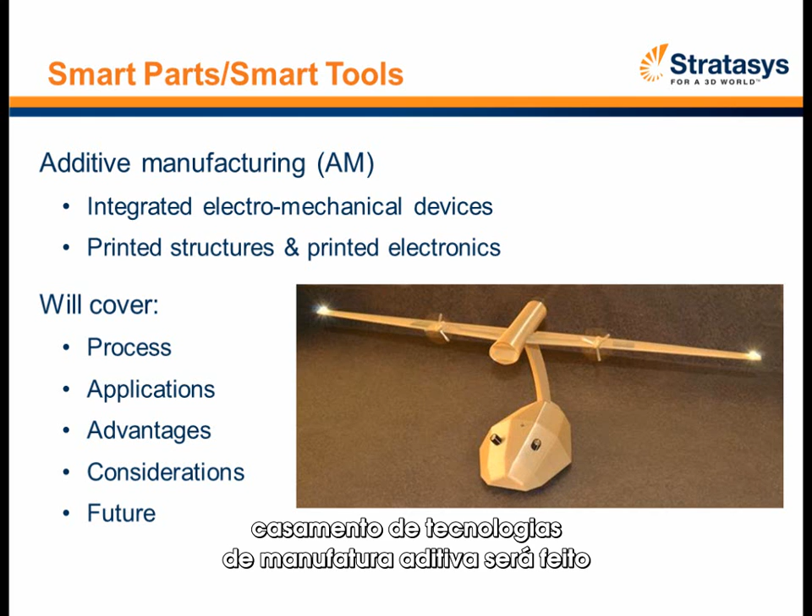Well, thank you, Kim. I'm delighted to talk about the smart tools and smart parts technology and how it's leveraging additive manufacturing technologies, not only those offered by Stratasys, but also those offered by Optomec. What we're going to cover in this presentation is how these processes work individually, how they then work in a combined process, what's really the output they deliver as far as applications, and then the advantages of marrying these technologies together, plus what you have to think about when you do this marriage of additive manufacturing technologies.

So when I start talking about marrying two additive manufacturing technologies together, in particular I'm talking about the fused deposition modeling, the FDM technology from Stratasys, which uses a number of different types of engineering thermoplastics that we can extrude with the FDM process. The Optomec aerosol jet, AJ for short, is a way that they actually print circuits onto non-planar surfaces, typically using a nanoparticle silver conductive material that gets printed onto a surface.

So why do we do this? We talked about fully printed hybrid structures. So people out there want to know what a hybrid structure is. Well, from our opinion, a hybrid structure is -- if you've ever taken a radio apart, or any type of electronic device apart at home, and looked inside, you've got wires, you've got circuit cards, and so that's basically hybrid.

You've got printed circuit boards, you've got wires that attach different power sources. How do you minimize the amount of components that go into that? And the number of wires, connectors, clips and brackets to hold down the different wires? How can we use the power of additive manufacturing to eliminate the number of components and connection points, and combine that together? That's what we're considering to be hybrid -- being able to integrate a 10-piece assembly into maybe a 1 or 2-piece assembly using the power of additive manufacturing in this particular case.

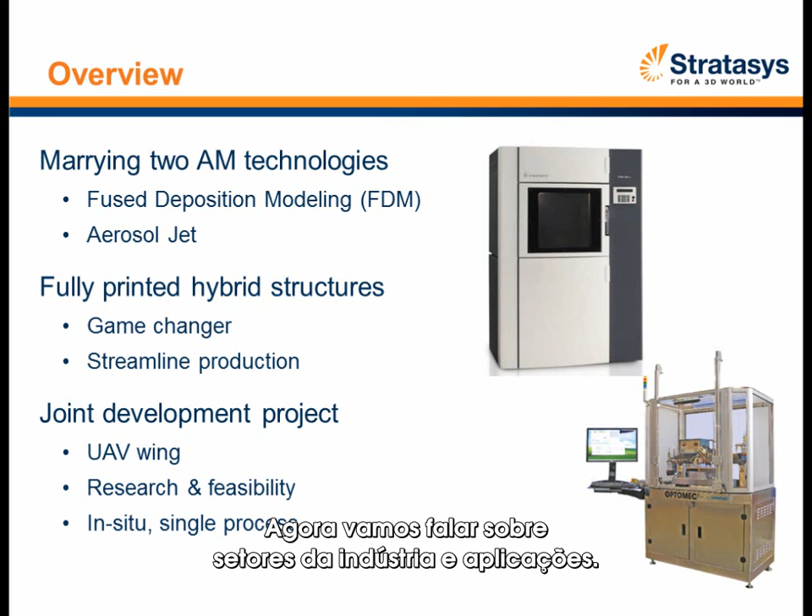So now I'm going to move into talking about industries and applications. This is just a short list of some of the industries. Obviously the aerospace industry - when you start looking at hybrid structures, the integration with airplanes, both for commercial and military applications, getting lightweight structures reduces fuel consumption, and that's a very positive thing. If you can find ways to continue to remove weight from airplanes and improve fuel efficiency, the airlines will give you a big hug. So that's a key area.

Then we move on to automotive. We all pretty much own cars and drive and depend on our cars daily. Where could this go in automotive? For those of us who might be engineers or just have the knack of taking things apart to see how things work - have you ever taken a dashboard out of a car and seen all the wires and connection points behind it? Or put a radio in your own car and seen all the wires and connection points behind your dash or console? Just think if we could actually reduce a lot of those wires and connection points with an integrated piece of structure.

Weight reduction, faster performance of electronic signals and connection points - so consumer electronics, many different fronts on that front of what we could do, anything from 3D interconnects for stacked dies and complex packaging applications, which is a very interesting one for consumer electronics.

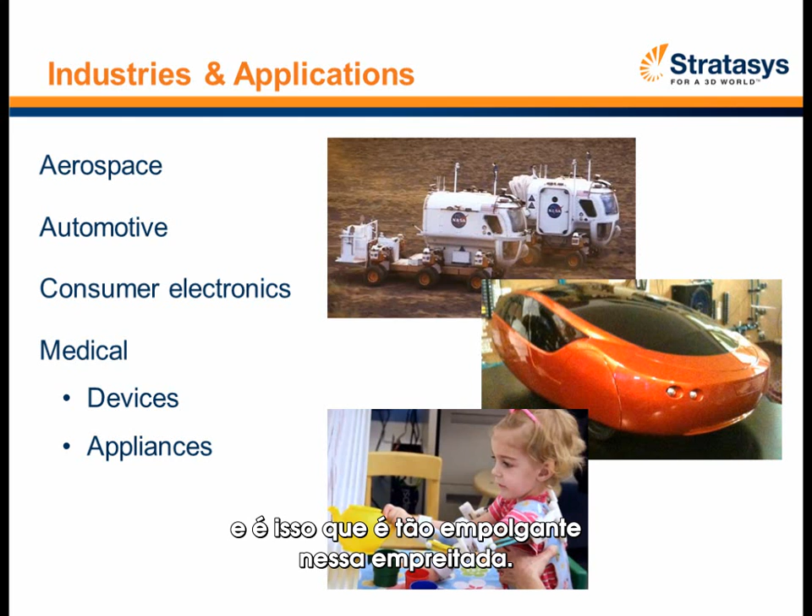So the advantages of the technologies - if you're sitting back and saying, hey, Jeff DeGrange just sounds really great, but what are the advantages here? I did talk about reducing weight - that's very real. Having energy-efficient structures, reduced part count are very critical in many different industries. When you reduce the part count, you reduce the amount of time it takes to assemble things, to check things. So that comes with real cost savings and real cycle time savings.

And when I talk about connection points, there's fewer failure modes at connection points. Can you imagine taking wires, and at the end of the wires you take your red wire and screw it to another red wire, put an electrical cap on it, and continue on down the line? If you can eliminate all those connection points, and the little clips and brackets that have to hold the wires down - how well did you tighten some of the wires? That's what we talk about as failure modes. Typically in a wired electrical system, those connection points, when the cars or vehicles vibrate, often will break apart and you'll lose a connection, and then something doesn't operate properly. So what are the benefits of this?

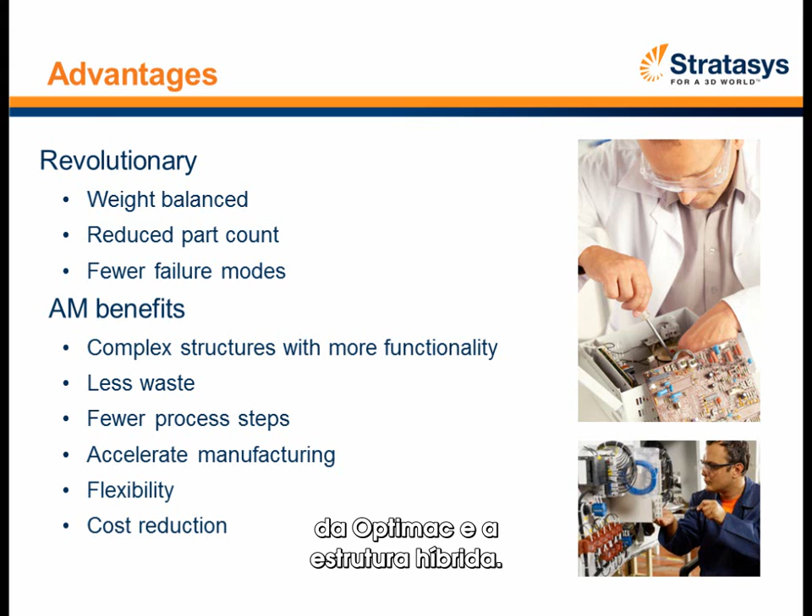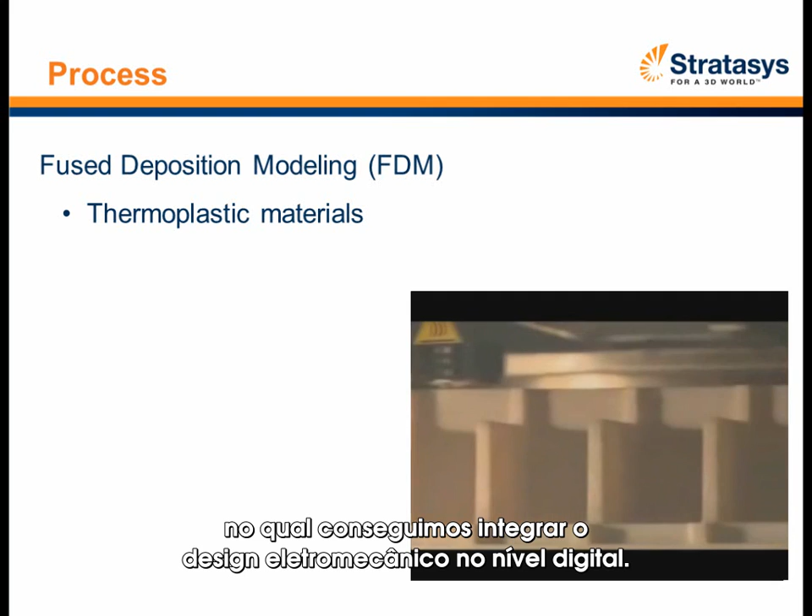Thanks, Jeff, I appreciate the great lead-in there. Today what I'm going to give the audience is an idea of a detailed project in which we were able to integrate the electromechanical design at the digital level. We're really excited about how these two technologies come together to enable us to do new and different things that we could not do in the past.

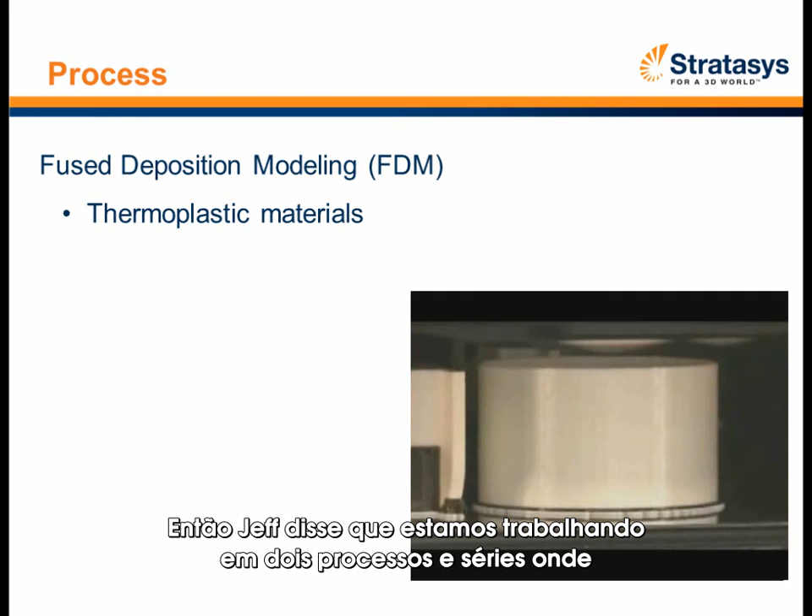As Jeff talked about, we're working on two processes in series where fused deposition modeling, or FDM, is the first process, which was used to build a wing structure. FDM is an additive layer manufacturing technology. It precisely deposits production-grade thermoplastics in a layered method to produce a finished part.

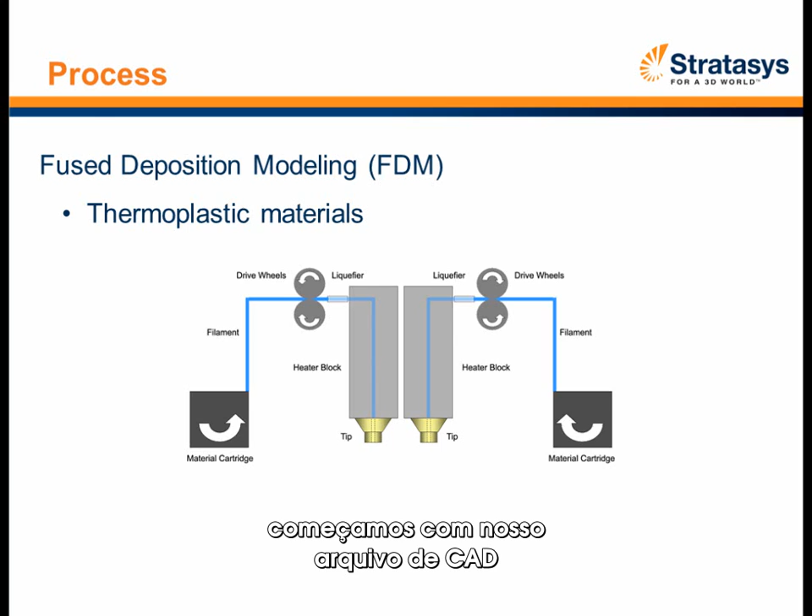For the project we're working on, we started with our CAD file and put it into the FDM software called Insight, which was able to slice our file for build, preparing the CAD model for being consumed within the FDM Fortus system. Once the file was processed, we put it into the system for build, and out comes a part complete and ready to go.

In our particular case, our wing was built without any internal support geometry or material, and the part was able to be taken off the build sheet and go directly to the post-processing steps for marrying with the aerosol jet technology.

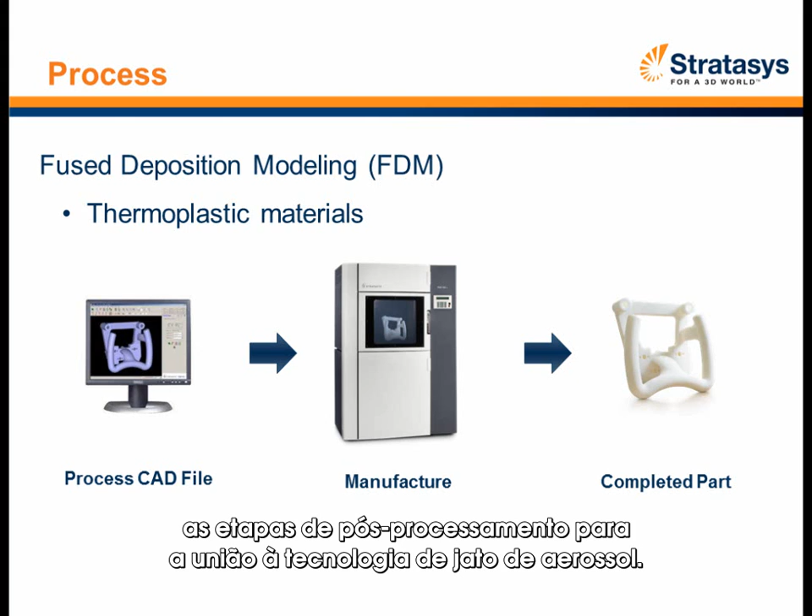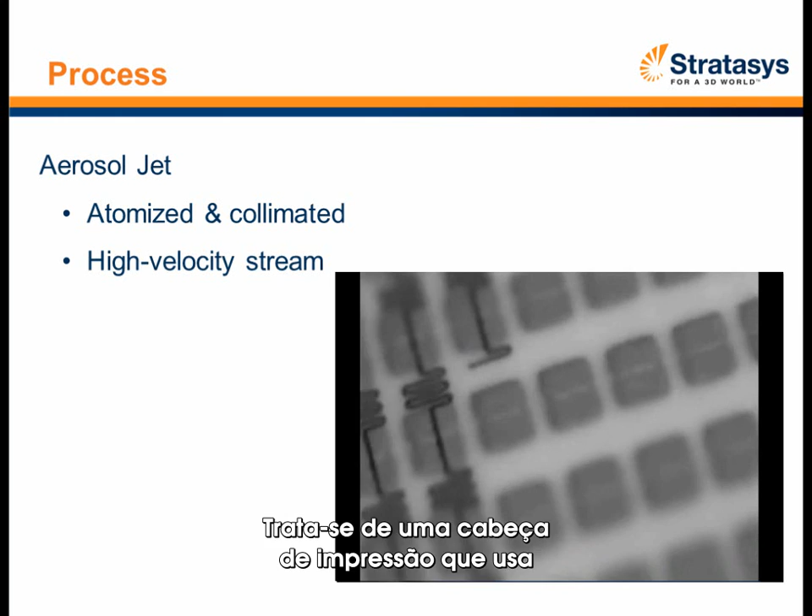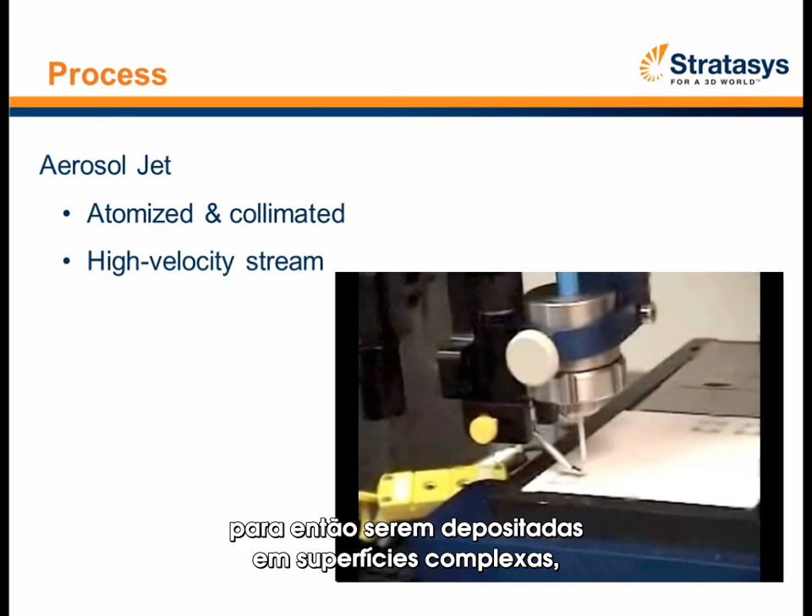So, aerosol jet is Optomec's product. It's a print head by design that uses conductive or a variety of different kinds of inks that can be atomized, collimated, and then deposited on complex surfaces, as Jeff mentioned earlier, with a high velocity stream. You see in the video here how the head is moving around and the ink being deposited on that flat surface.

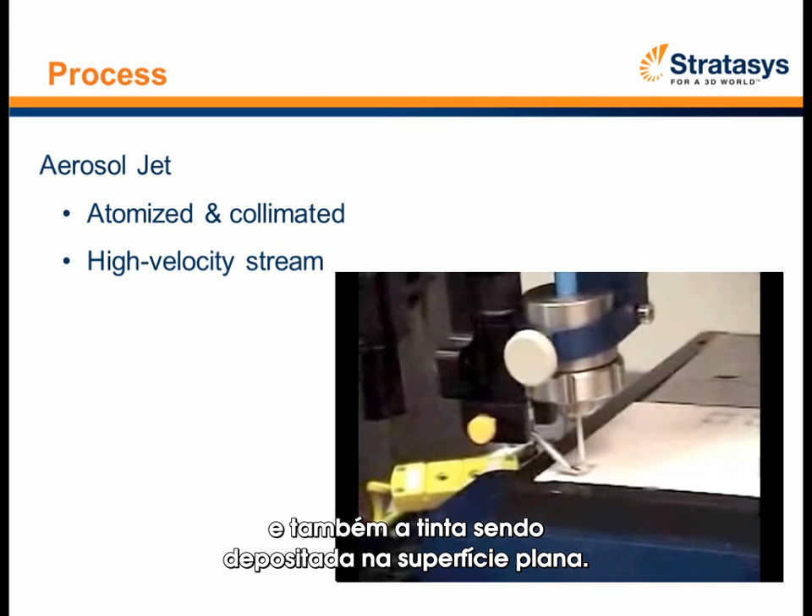The aerosol jet technology starts with a reservoir of ink. It then excites that ink into an atomized mist and feeds it through the nozzle, which creates a highly collimated stream of ink so it can precisely place that stream down on a surface.

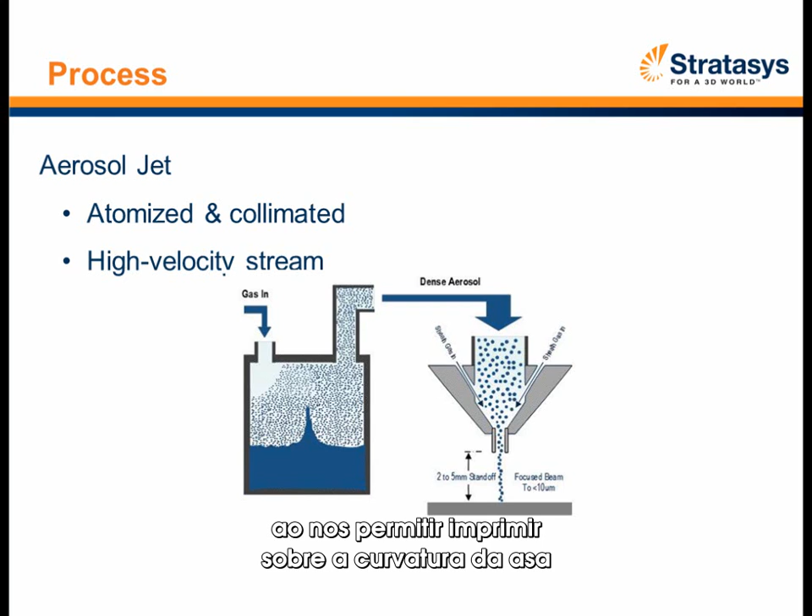The fact that it has a standoff distance, you can see here on the chart - let me get my pointer on. So right here you see the ink coming out with a standoff away from the part. This actually played favorably in our project by allowing us to print over the curvature of the wing without having to go to 5-axis control.

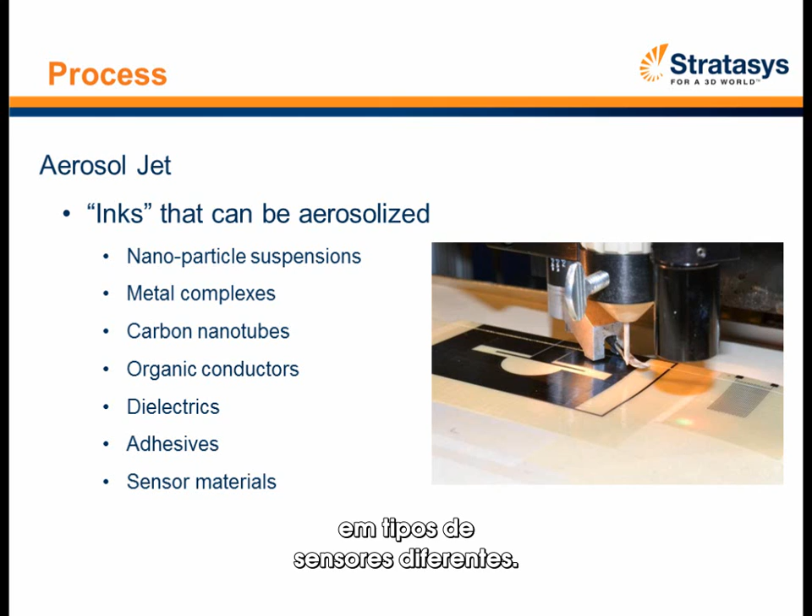Here's an image of one of the parts we were actually printing for our project. The inks we had to select from are pretty vast. Optomec has a wide range of inks, from conductive to dielectric, to adhesives that can be used for surface mounting. A wide array of different materials can be used to print your part with a variety of sensors, and I'll talk to you about all the different items we pursued in a moment.

So what did we take on? We took on the FDM process to build the wing, and that wing had to be compatible with the aerosol jet process. Two criteria came out of that: one, we wanted the wing to be representative of the typical application of a UAV, so the mechanical strength and the high heat deflection temperatures had to match the application.

The aerosol jet material was a nanoparticle silver ink, Cabot CSD23. This material requires heat sintering to get the bulk material's conductive properties up to the highest level possible, and that sintering process occurs at 300 degrees Fahrenheit. So that folds back into the heat deflection requirement for ULTEM.

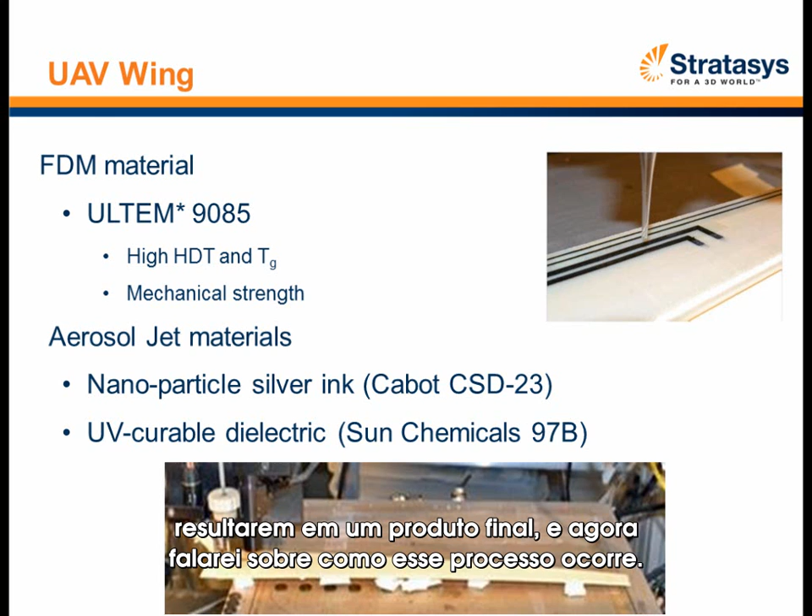ULTEM has a heat deflection temperature of around 330 degrees F, so we knew this part would withstand the sintering process. The two technologies have to map together to result in a final product, and I'll talk about how that process occurs.

First you want to design your part, both the structural part, in this case the FDM part, as well as the electronics. Whatever you're going to build has to be designed prior for the 3D definition. Once you've got your design, you can build your FDM structure, and once that structure is complete, you do surface prep on the FDM part.

One lesson from our trial was that the inks Optomec can deposit did not perform well with our low surface energy ULTEM material. As deposited, the materials would bead up or run into the cracks, so we had to find a solution to make the two compatible. We found that simple sanding or soda blasting the surface roughed it up enough to provide the required surface energy for ink deposition to go extremely well.

We also found that building fixtures was very beneficial to the process, to index the parts underneath the print head, because there are several iterations of printing involved.

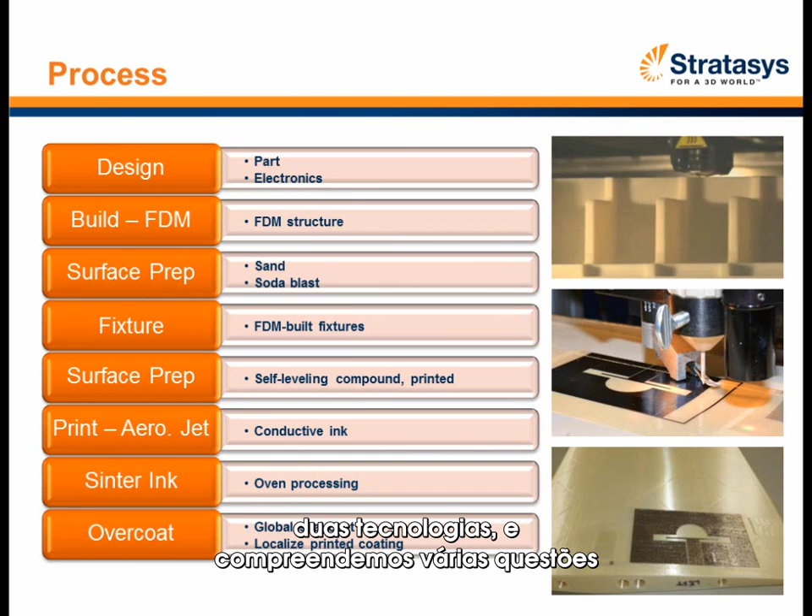Then finally, we went back into the fixture, put it back underneath the print head, and put a dielectric coating over the top. This protects the part and keeps the sensor from being exposed to external elements. So we went completely from design through finished part with the two technologies, and understood a variety of issues we had to solve to get them to be 100% compatible.

So what kind of electronics can you print, and what's of interest in this domain? There are three basic categories: sensors, circuits, and electronic components. On the sensor side, think of resistive temperature detectors, heating elements, antennas as used in this project, strain gauges, and even chemical sensors - the ability to put a robot into an environment and sense what kind of hazardous chemicals might be in the area. All of that is possible with these printing technologies.

From a circuit side, power, signal, ground planes, and RF strips all have slightly different requirements. A power circuit requires the highest level of conductivity possible. If you run a lot of current down a highly resistive circuit, you get essentially a heating element that would heat up and potentially burn or destroy itself. So you have to create a circuit that can run whatever device you're trying to power.

On the signal side, it's almost the opposite - you're trying to get as little material down as possible to minimize weight, just enough to be conductive enough to operate the signal, so your light goes on, your light goes off, as minimal as possible. Ground planes and RF strips have similar requirements.

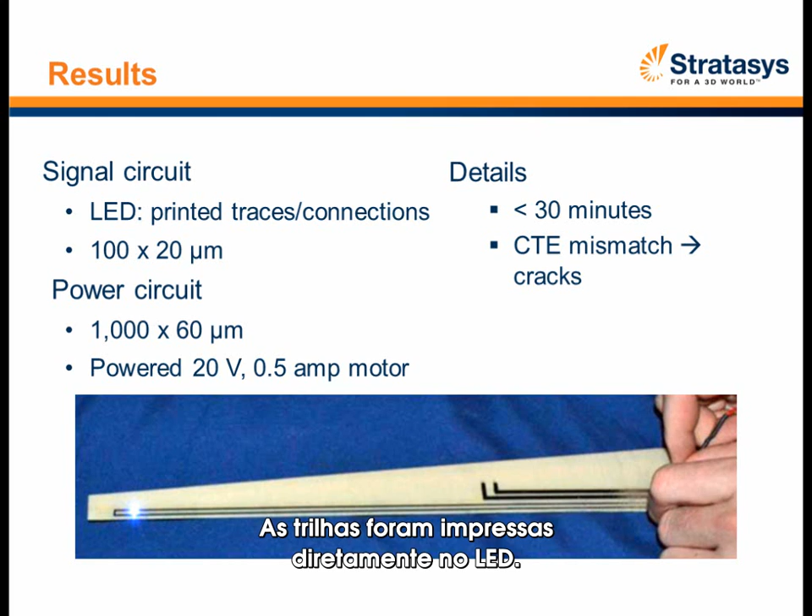down a circuit. So what happened? What were the results that we came out with? So on the signal circuit, we printed those at 100 microns wide by 20 microns thick, and printed the traces right up onto the LED. And you can see right there that the LED is glowing and actually flashes as long as you drive power to it. So that was extremely successful. We're very happy with that.

The power circuit, we printed at 1,000 microns by 60 microns, 1,000 wide by 60 thick. And we powered a 20-volt half-amp motor, which is 10 watts of power across that power circuit without any resistive heating and any kind of negative performance. So this is the power circuit here in the image, and I apologize for not pointing this out before, but that's the LED. So both of those worked real well.

We did learn a lesson. Well, first I'll cover that these were all printed in less than 30 minutes. So although it's not a production rate, high volume type of number, it is for custom, one-off, low volume. This is an amazing capability to be able to print custom circuits on a 3D part in minutes.

One of the things we did learn on the project, FDM thermoplastics, Ultem in particular, has a CTE value of 4 times 10 to the minus fifth. That's a fairly high CTE value in relation to metals, which is 10 to the minus 6 number. So an order of magnitude different.

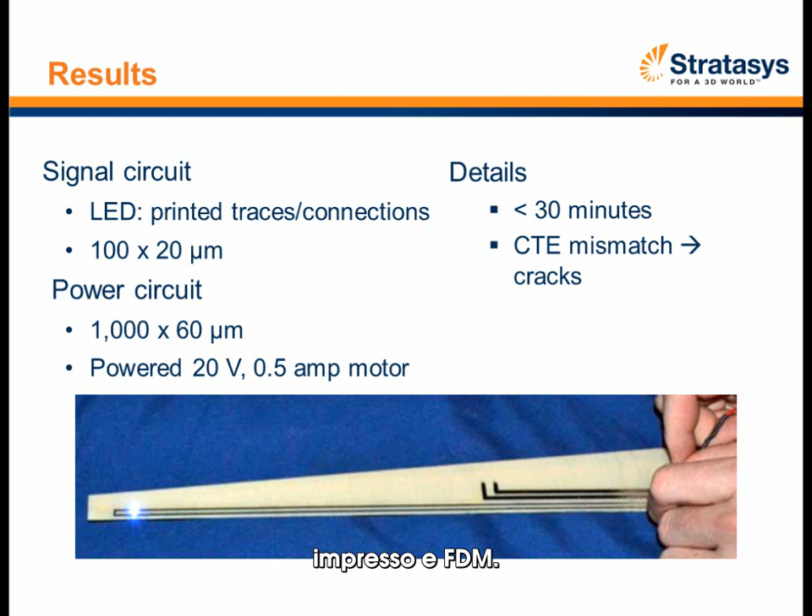So we do have a CTE mismatch between the metal conductor and the Ultem structure. So we use that dielectric material as a bridge between the two to minimize the localized strains that were being created for a high temperature delta, which was part of the sintering process. So under normal conditions, the CTE delta, the mismatch, is not terribly important. But under the cure-sinter process, you can literally crack your deposited circuits or sensors just in the sintering process alone. So that has to be identified and dealt with through your dielectric material, your printed material, and your FDM material. It's one of the lessons learned from our project.

On the antenna side, as I mentioned before, the slot antenna produced video quality transmission over a Wi-Fi network. The interesting things that we learned out of this is that printing wide surface areas and then being able to manage a very narrow gap, those were critical elements of this antenna. So being able to manage those appropriately is very important. So we used a wide nozzle for the area and then a narrow nozzle to come in and print the very fine features. Got very, very good results.

Now, what we didn't achieve was the strain gauge. These were being printed at 100 microns, very fine conductive traces, and you can see the magnified view here of each of these traces are the lines that were deposited. This is actually right here just a pad for terminations to the signal processor.

So what we found is that because we didn't want to print on the dielectric, which might mask the strain in the wing, we were trying to print directly on the Ultem. And because we were attempting not to sand the surface completely smooth, we were trying to work with the as-fabricated surface minus just the soda blasting. We found that we couldn't get the traces to be consistently conductive without localized errors. So we'll have to find a different way to marry strain gauges to the surface, whether that's through a dielectric that doesn't mask the strain, but that's an ongoing effort that we need to work on.

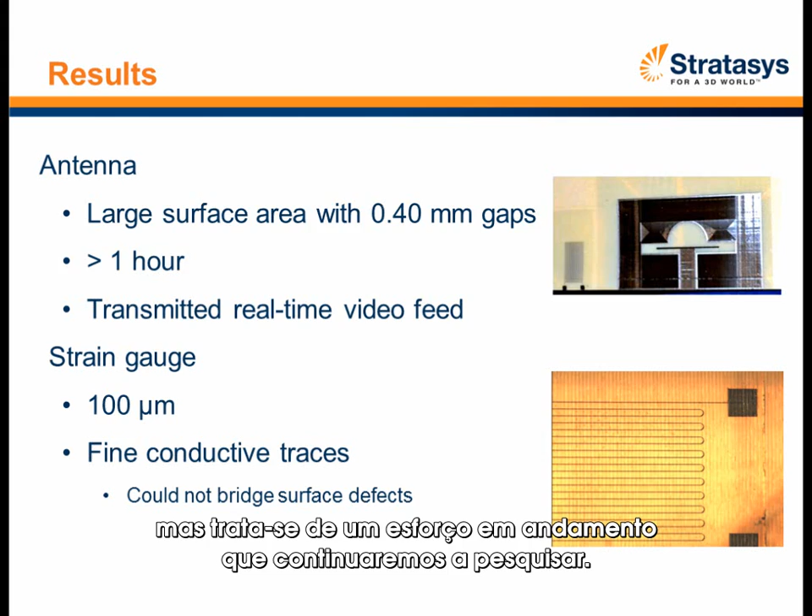So in summary, what are the advantages of what we learned? Well, we've proven that we can marry the electromechanical design at a digital level. We've realized the flexibility that we obtain from design optimization and the ability to change that design as we learn more about what worked and what didn't.

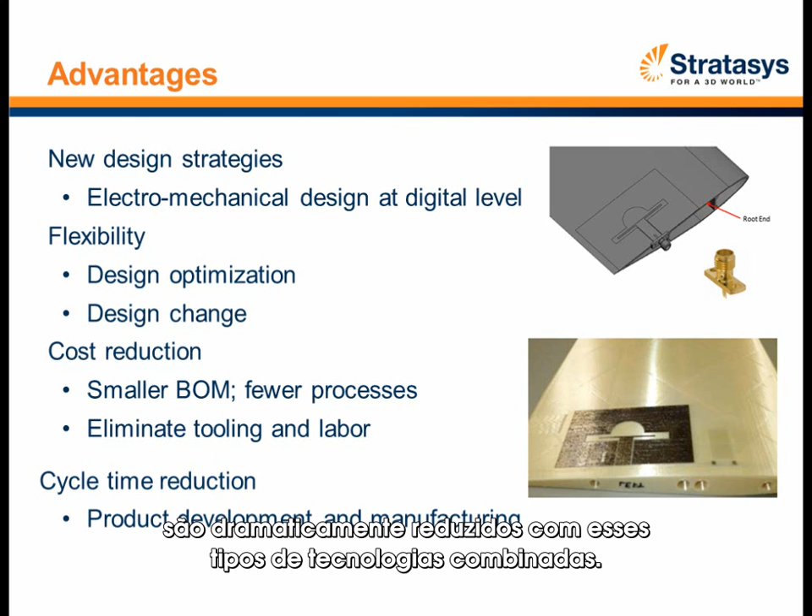In addition, cost reductions from smaller bill of materials and fewer processes helped us eliminate a lot of additional costs that could occur in these kinds of products. Eliminating the tooling and the labor for assembly is another great advantage for both cost reduction, but also feeds into cycle time reductions. Your product development and manufacturing times are radically reduced with these combined technologies.

So just to give you a picture of the final product, this is a demonstrator that we created to take out to a variety of shows and just put in people's hands. The actual parts we talked about before were functional large pieces, but we reduced this down to a demonstrator. It's got a 13.5 inch wingspan. If you see it at the shows, you'll know what you're seeing.

It takes about 6 hours to build one of these in FDM, and an hour to print it at the aerosol jet. It does have functioning motors, LEDs, and then the slot antenna and the integrated contacts are there so you can see them, but we don't have anything hooked up to them to demonstrate those.

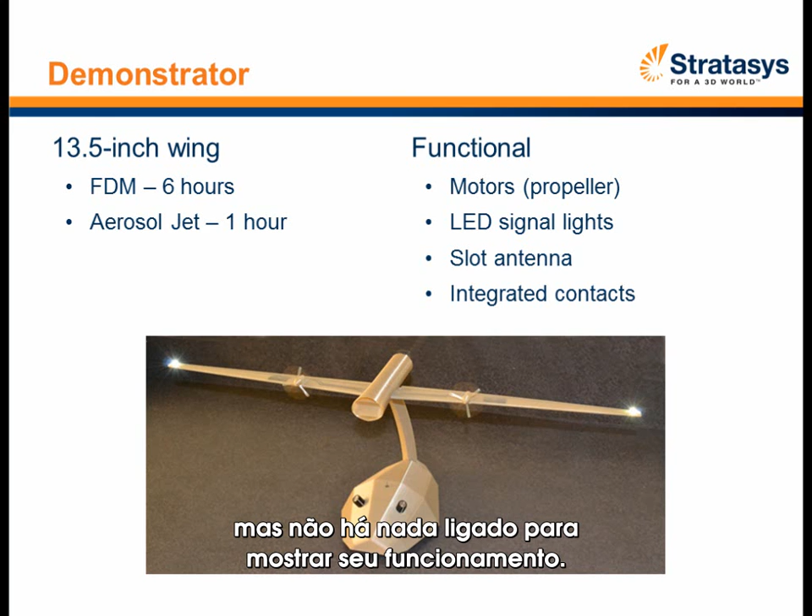So, R&D for future activities. First, I want to make sure everybody understands what considerations are important. Surface finish, the surface energy - knocking down or increasing the surface energy of the Ultem parts to get the inks to deposit consistently. Make sure you consider CTE mismatch and how you're going to manage and handle that. If you're going to use a sintered ink, then you want to make sure your heat deflection temperatures and your materials match.

In the future, we want to start looking at how these technologies are brought together. What are the design rules that we need to document and put together for users? What are the kind of interface requirements we should be looking at, and how to document those? And then performance expectations - what can you expect when you marry these two technologies, and what performances can you expect for the variety of sensors, circuits, and devices?

And then finally, as we've already learned with our demonstrator models going to shows and being shipped and traveled and handled, how fragile are those? How do we repair them? How can they be modified if we want to add additional circuits on it? These are all things that happen in a regular design product, so how can they be accomplished with these new processes? So we look forward to documenting those and getting them out into everybody's hands.

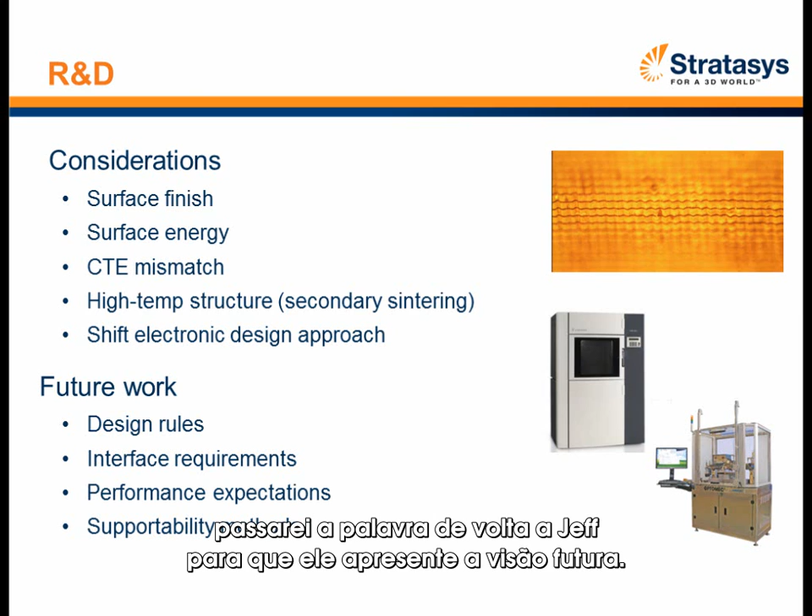And without further complication or discussion, I will hand this back to Jeff to give you the future vision.

Well, the future is pretty exciting on where this technology goes as the technology readiness level continues to rise, with all the details that Bill provided you on the material and process. And when you start thinking about all the technology integration, particularly for robotic systems and sophisticated electromechanical systems, the potential of doing in-situ process control, having closed-loop feedback - is things too hot, too cold, what are pressures - to be able to do that is pretty exciting for us, what the future holds.

Then you say, okay, what applications does that go into? We really think that because additive manufacturing technology, particularly FDM, can actually mimic organic shapes very easily, the ability to do various types of prosthetics that could improve a person's life who's lost a limb from an accident or one of our veterans, integrating those organic shapes with the electronics and circuitry to provide motion control, is pretty exciting - and it's not Star Trek-y.

There's a number of activities going on in the States and worldwide on this front, that now with these two key technologies, we could just accelerate those concepts to pilot, and then from pilot to production commercialization level to improve quality of life. So that's what we think is pretty exciting about what the future holds for us, and we think we'll see incremental things come out in the next 2-3 years, and then 3 years and beyond. Boy, it's whatever you can dream, you could pretty much make.